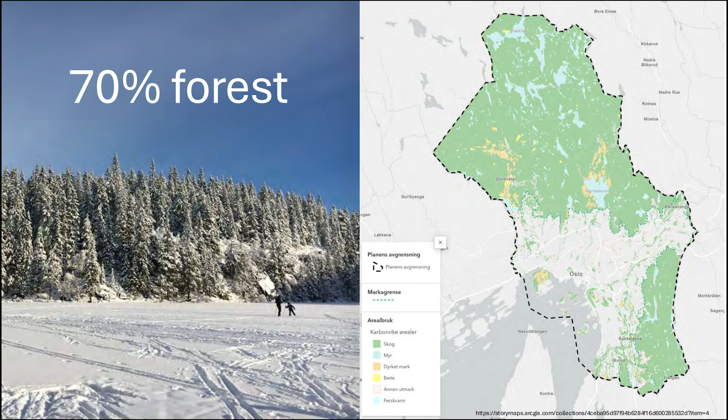So when I talk about Oslo, I usually start by sharing this remarkable fact that usually surprises people a lot: the city of Oslo is 70% forest. That relates to the historical situation in Oslo, with a relatively small population, a large hinterland, and a reliance on logging as the main industry for many years. It's also a question of geography—the city you see on the image on the right is in the lowlands, where the green forest is in the hills, more than 100 meters above sea level, to the east and north of the city.

A few more facts: Oslo has over 700,000 inhabitants at the moment. It's been growing steadily over many years, due to people moving from other parts of Norway, but also from external, international migration. Oslo, as I mentioned with the European Green Capital, has consistently been ranked as one of the sustainable cities in many ways.

So I'll start by saying something about the urban sustainability policies that have been in place and enacted in Oslo over decades. I'll start by going back to the 1950s. What you see here is the 1950 general plan for Oslo. On the left, you see the park plan for Oslo from 1953. These are pretty fundamental documents related to the combination of the city of Oslo with its hinterland.

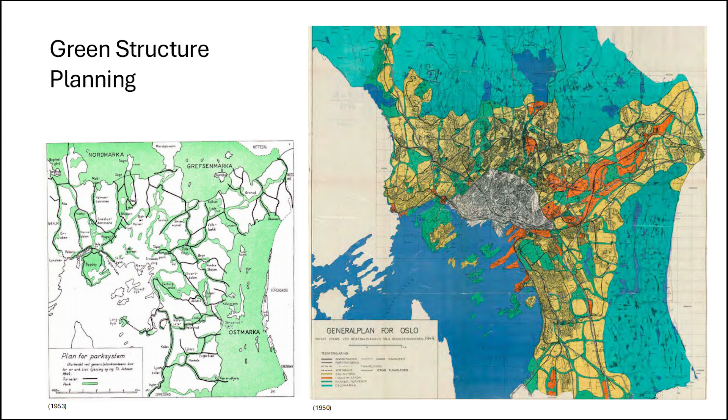At that time, people didn't have cars. Cars didn't become available for private purchase for another 10 years in Norway, so everybody depended on the subway to go to work. These yellow dots were about 10 to 20,000 people each, surrounding one subway station. That's a principle Oslo has been planned after ever since.

Now we jump to today. The image on the right is from the 2015 municipal plan. A lot has happened over 50 years, and you still see the subcenters, marked in circles—the subway stops with little local centers.

There are also some subway stops open for future expansion. On the top left you see subway stops that still don't have major urban development around them and can be developed further. On the bottom left, you see development areas the city is looking at for further housing—largely former industrial areas now available for urban development and housing.

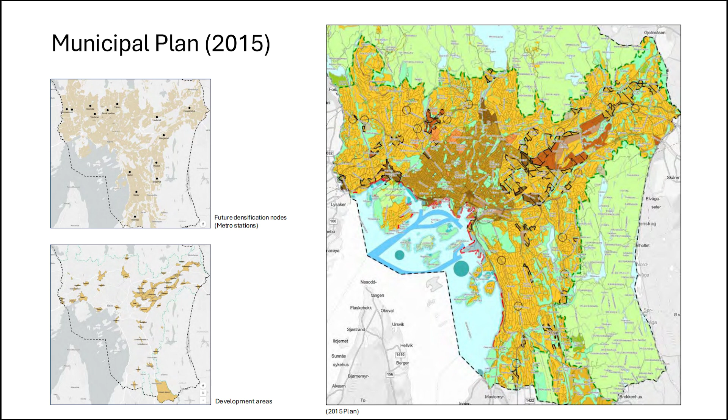If we jump scale, we go to the regional plan for Oslo and the surrounding region. Oslo is the center red circle. The regional plan specifies that the vast majority of future development in the region should happen in Oslo or in other cities around Oslo that have a railway station. The smaller red dots are surrounding smaller cities with railway stations, and 90% of all growth in the region has been channeled into these railway-station-adjacent areas for the last 10 years. The plan is now being revised—it's been very successful, but with some consequences you can see on the right.

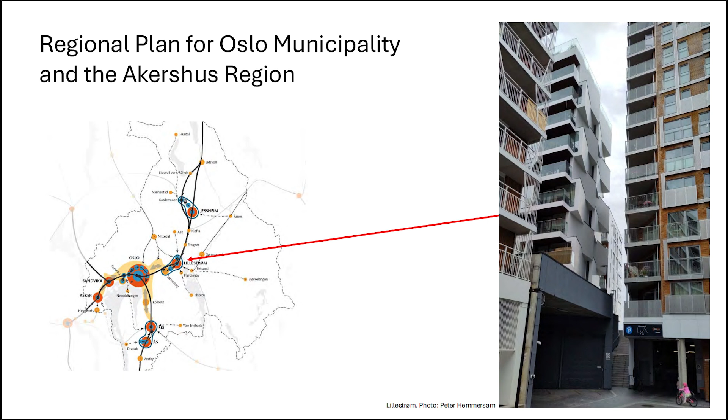This is one of the small, up to about 10 years ago 2-to-3-story, station towns outside Oslo, where suddenly developers understood they could build really tall buildings because they were right next to the railway station.

Another urban policy in place for a decade or more is the policy for opening rivers and streams. In 1990, 67% of all rivers and streams in Oslo were covered up—used as sewers, put in pipes, and buried underground so you could build houses and whatever on top. But this policy was installed in the 2010s with the municipal plan in 2015, aiming to open up as many of these rivers and streams as possible.

The reason you want to renaturalize the waterways is to increase biodiversity and water quality. The Oslo fjord has very poor water quality, so all the contributing rivers have to be cleaned up in order to clean up the fjord. You also want to handle increased precipitation due to climate change in the coming years, creating drainage buffers that slow the runoff of water so you can avoid floods downstream.

You want to use this opportunity to uncover where pollution happens, and it turns out there were a lot of unmapped and undocumented pollution sources, private and public. And of course, also the question of aesthetics or pedagogy, teaching the inhabitants of the city about the natural landscape the city is built on, installing a sense of care amongst the inhabitants.

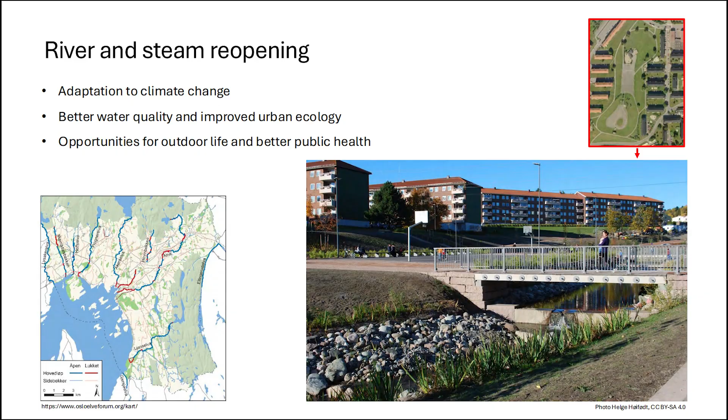One of the consequences is, of course, that these spaces become hugely popular. So the houses you see in the image here have suddenly jumped in price compared to the situation before the river opened.

The next policy Oslo has been pursuing for the last decade or two has been the bicycle strategy. It was decided in 2013, and the goal was to bring up the use of bicycles for everyday commute from 8% up to 16%.

It's about legibility and visibility, making it easy to see where to cycle and where the cyclists are. It's about safety and accessibility with these red bicycle boxes, so bikes are allowed to enter the cross sections before cars. It's about protecting bike lanes and increasing the capacity and experience of biking, so more people can cycle safely.

The point of the whole thing was to make cycling part of everyday life for people, and I think that has happened to a large extent. There were numbers released recently showing that 90% of all people in Oslo can reach this network of protected bike lanes within 200 meters from where they live, but also numbers showing that even with the increase in bicycle use, we were still far from the 16% the strategy set out in 2013.

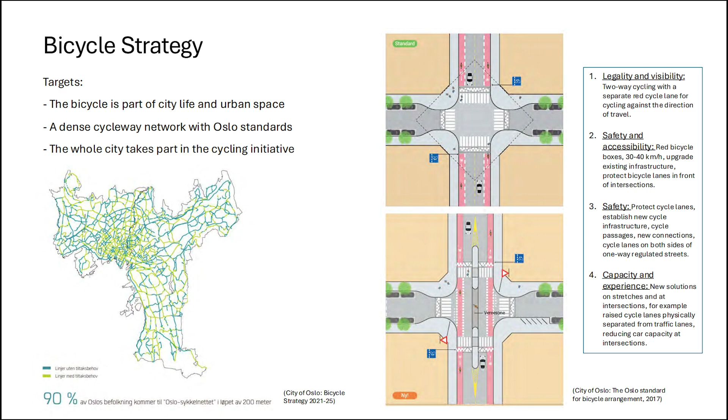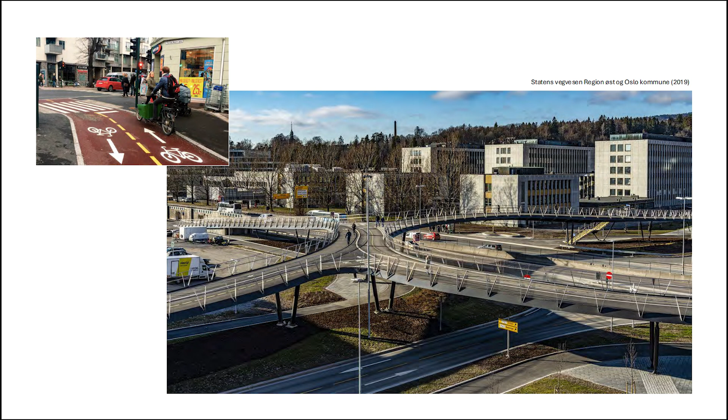So the measures put in place were quite different. On the top left, the small image, you see one place where a small bicycle connection from one street to the other suddenly facilitates bike riding, with little red and green signals for bikes. On the right, you see much more extensive and expensive bike networks - this is a bike bridge installed along one of the higher tier, first class cycling routes.

The reason this happened was that the city wanted to make the harbor and the water more approachable to people, and to use the opportunity for cleaning up the water in the inner harbor. But of course, this required heavy investment. Since Oslo is at the bottom of a fjord, there was a motorway running through the city center along the harbor, separating it from the city. The government paid to put that into a tunnel, which suddenly made it possible to walk from the city to the harbor, which hadn't been the case before.

So the city decided to build a continuous public space along the harbor - a 9-kilometer long harborfront promenade, making connections from the city down to the water. There's this promenade, but also squares and transversal connections linking to the city areas behind. Some of these areas were close to the harbor originally and were not particularly wealthy parts of the city, and some have enjoyed being connected to the city in a new way.

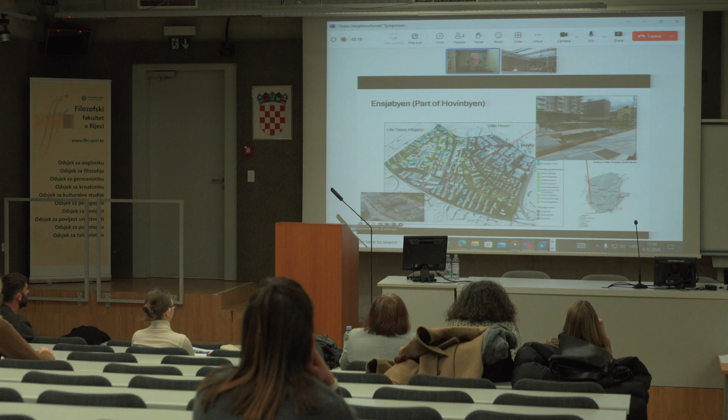So the whole Hovinbyen area has a future transformation potential of between 30 and 40,000 new dwellings and between 50 and 100,000 new workplaces. It consists of many different areas, and the Ensjøbyen is just one part of it.

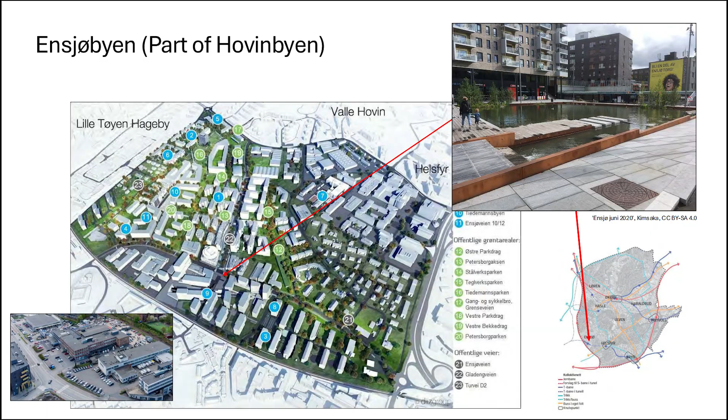And here we see Ensjøbyen, which is the part closest to the city center, where there was an old existing subway station. There was a commercial street built in connection to it, and housing and public institutions popping up nearby. So this area has 7,000 new apartments and is supposed to be fully developed in about 5 years from now. One aspect of this project refers back to what I talked about before, about the nodal point developments in Oslo.

So Oslo has an extensive subway system. Along some of the stations, there are these local centers with about 15 to 20,000 dwellings, people living near each subway station within walking distance. Some of the subway stations, however, did not have a lot of housing surrounding them, and this was one of them, the Ensjø subway station. So this became one of the nodal points along the subway lines that enables the city to develop without having to build new infrastructure.

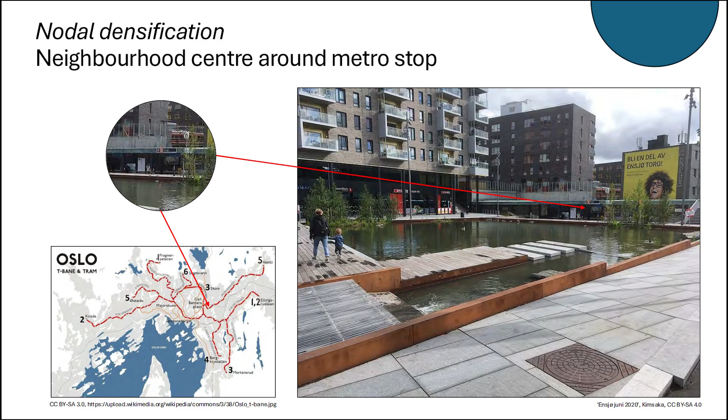So the next project I want to mention is called Car-Free Livability. This is a program that was initiated in 2015 or 16, and the basis of the project was that, looking at the climate gas emissions from Oslo, about 60% of the emissions were from car use. Yeah, 60% of the city's CO2 emissions were from vehicles and 40% from private cars, so about 2/3 of that. There is a great incentive to try to reduce the use of private cars, particularly in the city center.

And this, of course, also relates to the possibility of improving the quality of life for people living there and making the city center more attractive for the citizens of the whole city.

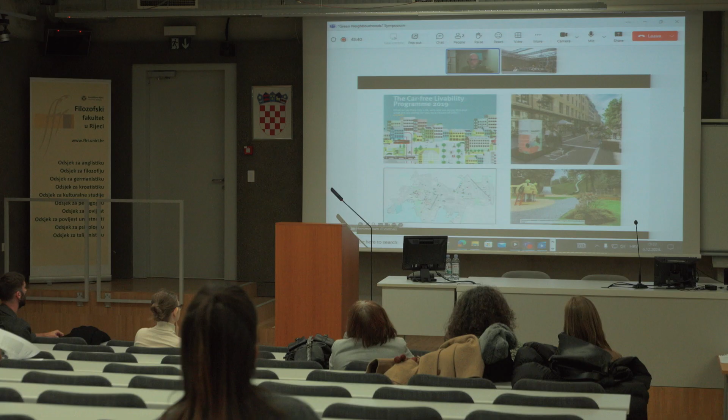So the way this project was installed was very gradual. On the map, on the bottom left, you see that the project started in the downtown area on the left and then expanded to areas you see in the blob to the right. So from being just 1.5 square kilometers in the absolute city center, it's gradually expanded to cover more and more of the city. So what the project does is close off streets.

It has reused parking spaces for alternative uses, and the way it's done is through a gradual, experimental approach. So the city has basically, year from year, tried out what happens if we close this street, what happens if we make a little park here, what happens if we plant a few trees here, what will happen.

And as you see, the installations in the images on the top right are temporary. They can be removed. Some have been removed, and some have been converted into permanent fixtures of how the city has improved its central urban spaces.

Of course, this caused a lot of controversy. People were very unhappy about losing parking spaces. So part of the project was also to actually improve urban logistics.

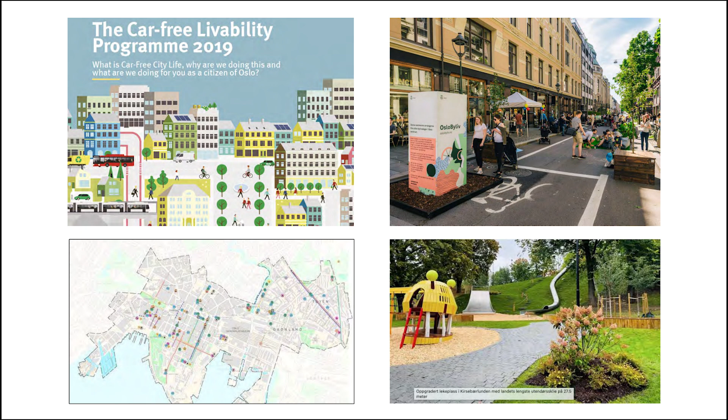So it's about reclaiming some of the parking spaces for goods deliveries, and it's about increasing the number of disabled parking spaces in the city. These were some of the measures put in place to counter some of the critique from car owners and from some of the shop owners in the city center who were fearful about losing customers.

But after a 10-year period, it turns out that overall there has not been a loss of customers, and there's been an almost threefold increase in the number of people in these city center streets.

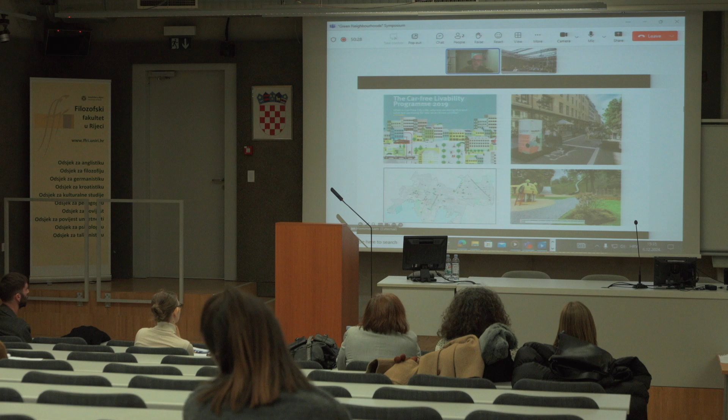So the last project I want to mention that has been important in Oslo's sustainability transformation is a project called FutureBuilt. This is a project that Oslo is part of in collaboration with the other bigger cities in Norway - Bergen, Trondheim, and Stavanger - and with some of the suburban municipalities in the Oslo region. The purpose of the project was to produce demonstrator projects for climate neutral architecture and urban development based on high quality architecture. The audience was primarily developers, and the purpose was to convince developers that it is possible to build climate neutral architecture, housing, and urban development projects.

It started in 2010 with these 8 municipalities. There are now 75 pilot projects that have been completed, and they have shown that they could cut carbon emissions in construction by at least 50% compared to current regulations and building practices. So that's been quite well established.

So what this project does - as you see on the graph on the left - has a purpose of, at least in the short term, a 50% reduction in climate gas emissions from new construction, and eventually a much more radical reduction. So this project offers counseling

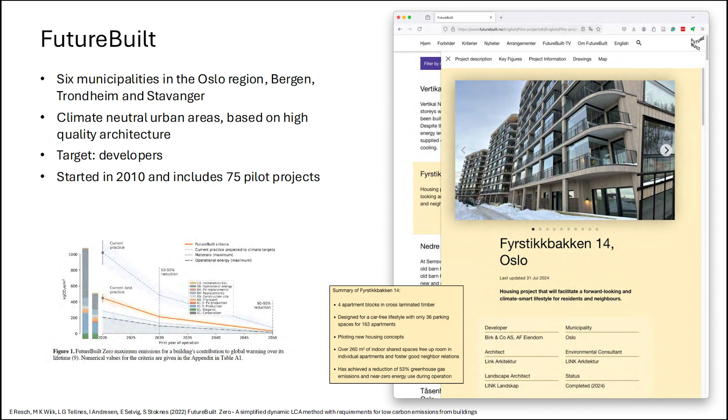So this is an example of one of the 75 projects in the overall FutureBuilt project, and everything's well documented on this website that you are welcome to visit.

So I will say a little bit about something that is particular in the Nordic countries, and I will use Oslo as an example of what it means to be a winter city. Every city is unique in its own way, and one of the things that makes Oslo and many other cities in the Nordic countries special is, of course, that the winter is long and it's dark. In Oslo, we quite regularly have about 3 months of snow every winter. The season has shortened in recent years, but still winter is an issue.

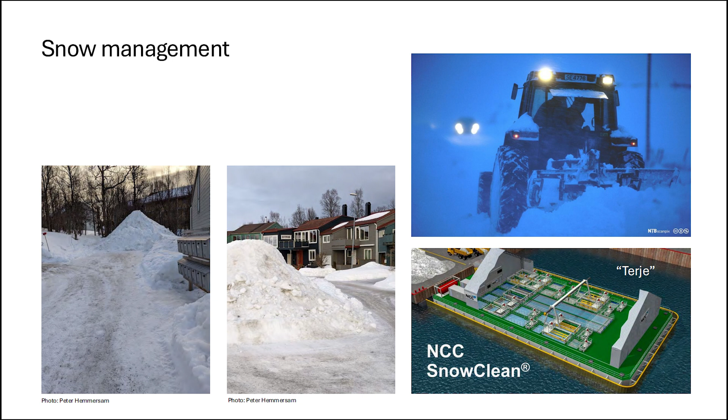On the bottom right, you see a high-tech solution: this is Terje, a floating barge that the city of Oslo uses in winter to get rid of snow. A challenge is where do you deposit snow once cleared? You can pile it, but it may be full of contaminants, road dust, heavy metals, even old bicycles picked up with the shovels. So Oslo has this big melting rig that also cleans the water before it runs into the Oslo fjord, one of the measures put in place to clean up the fjord.

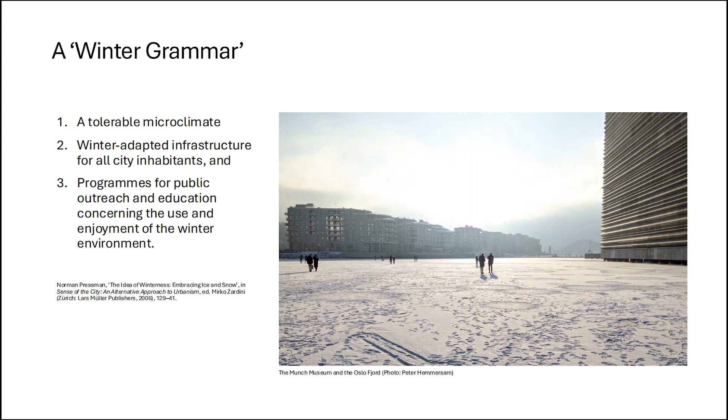There are different ways to talk about what winter matters in urban design or planning. Norman Pressman, the Canadian urban planner, has talked about the need for a winter grammar of urban design: making a tolerable microclimate in the city, urban spaces sheltered from wind and excessive snow, winter-adapting infrastructure so it's accessible for all people, and finally educating people about what the city can be used for, and celebrating winter when it happens in a positive way so people see it as an asset to urban life, not just a negative thing.

So all this is well and good. Oslo has come a long way with its urban sustainability transformation and policies. There are lots of actors building new urban development projects looking at climate impact, sustainability, water quality, etc. But we know urban transformation isn't without social consequences. I want to bring up a few social sustainability challenges Oslo encounters: gentrification, social segregation, and greenwashing.

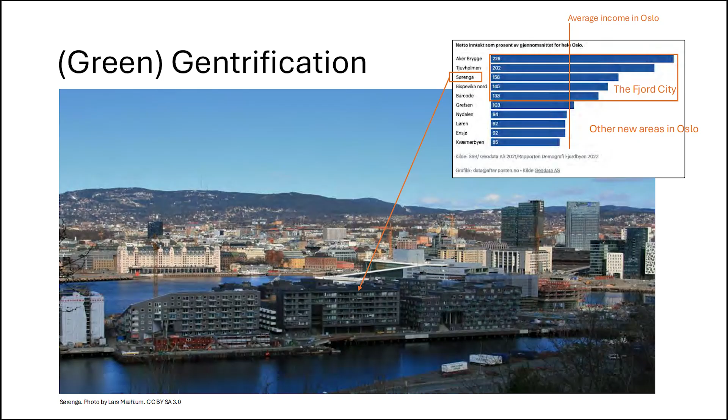That makes it, on one hand, a very successful project, but also a project that actually accelerates in some ways the social divisions in the city. And Oslo is a socially segregated city.

In Oslo East, the proportion of children in low-income families is more than 6 times higher than in Oslo West. The proportion of adults who are not employed is twice as high in Oslo East compared to Oslo West. Life expectancy is 4 years shorter in Oslo East compared to West.

And more than twice as many people in Oslo West experience their local environment as safe compared to Oslo East. So quite significant changes between these two pretty similar sized parts of the city.

I'll say a little bit about greenwashing in the end. It's a topic that I'm sure many of you are aware of. Very often we hear about greenwashing in terms of commercial products. Greenwashing is defined as something like false or misleading claims and symbolisms to give the impression of a commitment to environmental protection or sustainability.

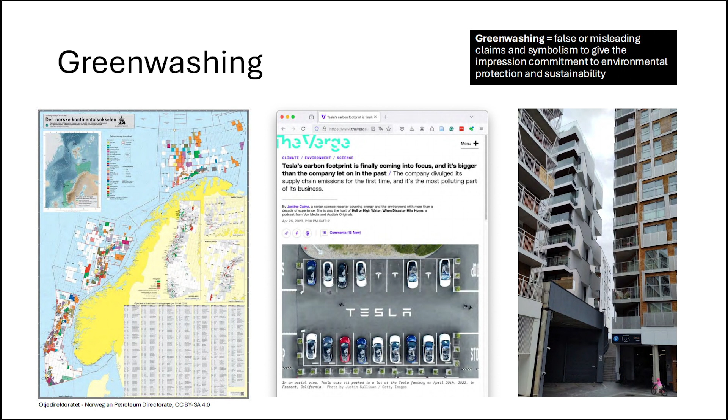So even though planning policy for these nodal developments is compact in order to facilitate public transport, the social sustainability issues have not really been developed to the same extent.

So this was what I had to tell you about planning and urban sustainability policies in Oslo. Thank you again for inviting me, and I look forward to hearing the rest of the presentations. Thank you.